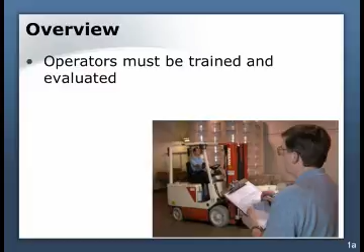Only a trained and authorized operator can drive a forklift. A qualified operator has been fully trained and evaluated in OSHA's required training topics, knows the general design and function of the vehicle, and knows the safety inspection and safety driving rules.

Operators can only drive forklifts if they have been assigned to use them. Your training covers the operation of the type of truck that you will be assigned to operate. You will need additional training to operate a different type of truck. Be responsible for the cleanliness, maintenance, and security of the truck that you have been assigned to drive.

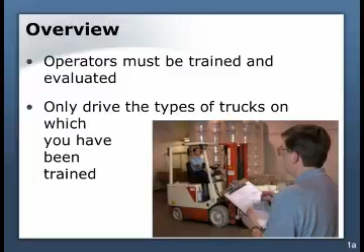Operating a forklift takes skill, mechanical knowledge, knowledge of workplace hazards, compliance with safety rules, and defensive driving under unique conditions. If at any time your forklift is found to be in need of repair, defective, or in any way unsafe, the truck must be taken out of service until it has been restored to safe operating condition.

You can prevent accidents by following safety driving rules. Remember the following rules of the road.

Do not allow anyone to stand or pass under raised forks, whether loaded or empty. Only loads that are within the truck's rated capacity can be handled. When you are using an attachment to handle a load, keep the load within the attachment's rated capacity.

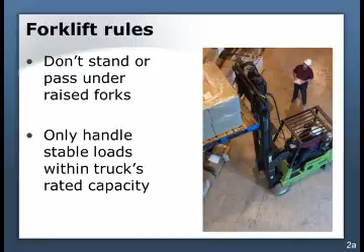Only manufacturer-approved safety platforms can be used to lift people. If the forklift needs to be used in a hazardous, classified location, it must be approved for the hazard.

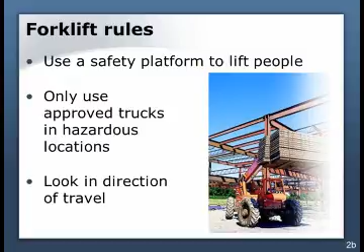Watch where you are going. Drive in reverse with the load trailing if the object obstructs your view. Keep a clear view of your path and look the direction that you are traveling. Never drive up to anyone standing in front of a bench or other fixed objects.

Allow no riders. Always keep your arms or legs within the truck. Placing them between the uprights of the mast or outside the running lines of the truck is not allowed.

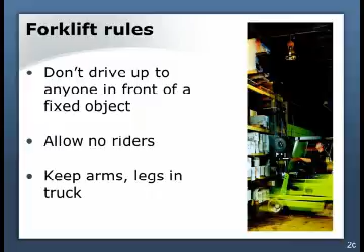Keep the load close to the ground while you drive. Raise the forks only as much as you need so that you clear the road surface. Tilt the load back slightly to stabilize it against the backrest.

Obey speed limits. Slow down for wet and slippery floors. Slow down for turns. Keep the forklift under control so that you can stop it safely.

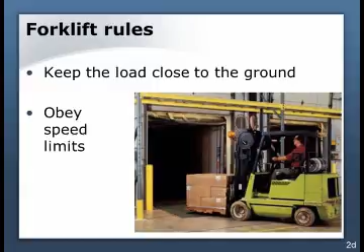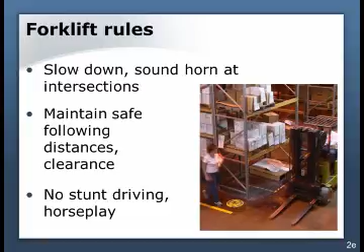Slow down and sound the horn at cross aisles and other locations where vision is obstructed. Maintain a safe distance of about 3 truck lengths from the truck that you are following. Do not allow stunt driving or horseplay, and avoid running over loose objects.

Stay within the rated capacity of dock boards and bridge plates. Make sure they are secure before you drive onto them. Keep a safe distance from the edge of any elevated dock, ramp, or platform.

While using the forklift to load and unload highway trucks, use mechanical dock locks or set the brakes and use the wheel blocks to keep the truck and the trailer from moving. Use fixed jacks to support semi-trailers that are not coupled to a tractor.

Check the floor for weaknesses before you drive the forklift inside. Do not use the truck to open or close freight doors.

When you get off of the forklift temporarily and remain within 25 feet of it and the forklift remains in your view, lower the forks, put the controls in neutral, and set the brakes. Lock the wheels if the truck is on an incline.

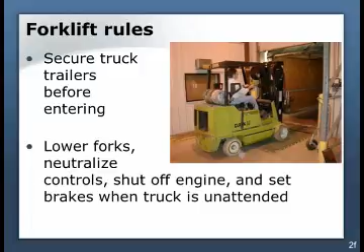If you will be leaving the forklift 25 or more feet away, or at any time it will be out of your view, shut the power off too.

Part of OSHA's emphasis on training is that operators need specific information on the types of trucks they will operate in the workplace environment where the trucks are used. When operators are sent outside of the facility for training, or when an outside trainer is hired to come in and present a training program, the employer has to make sure that the site-specific information is given to the operators.

When new employees will be operating forklifts, some of the operator training received from the previous employer may not need to be repeated, but site-specific information on the trucks and workplace will probably be required. Operators must be familiar with their trucks and the areas where they are used.

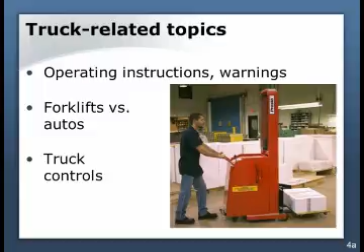The OSHA regulation outlines several forklift-related topics: operating instructions, warnings, and precautions for the type of trucks the operator will be authorized to operate; differences between the truck and the automobile; truck controls and instrumentation, where they are located, what they do, and how they work.

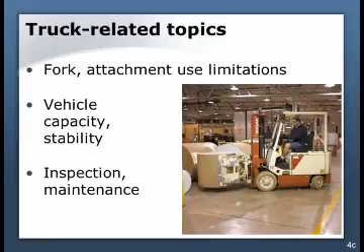Engine and motor operation, steering and maneuvering, visibility, including restrictions due to loading. Fork and attachment adaptation, operation, and use limitations. Vehicle capacity, vehicle stability, and any vehicle inspection and maintenance the operator will be required to perform.

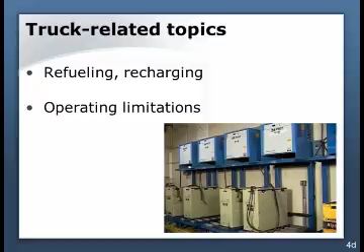Refueling and/or charging and recharging of batteries. Operating limitations. Any other operating instructions, warnings, or precautions listed in the operator's manual for the types of vehicles that the employee is being trained to operate.

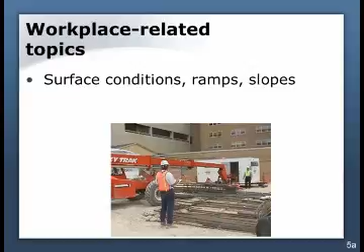The regulation also requires training in several workplace-related topics: surface conditions and where the vehicle will be operated, ramps and other slope surfaces that could affect the vehicle's stability, compositions of loads to be carried and load stability, load manipulation, stacking and unstacking, pedestrian traffic in areas where the vehicle will be operated.

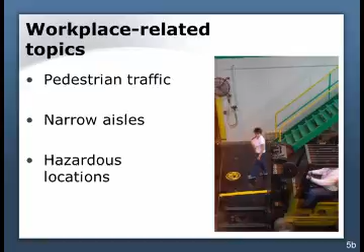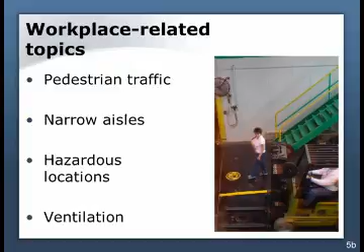Narrow aisles and other restricted areas where the vehicle will be operated, hazardous classified locations where the vehicle will be operated, closed environments and other areas where insufficient ventilation or poor vehicle maintenance could cause buildup of carbon monoxide or diesel exhaust, and other unique or potentially hazardous environmental conditions in the workplace that could affect safe operation.

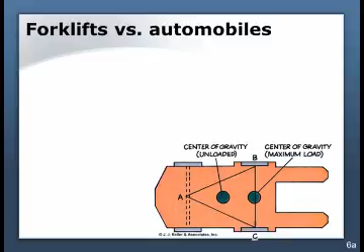Compared to driving a car, operating an industrial truck with a large load leaves the driver with limited forward visibility. Industrial trucks have rear-wheel steering, which makes the back end of the truck swing wide during a turn. Compared to cars, forklifts have different centers of gravity and balance. The center of gravity shifts as the load is raised and lowered.

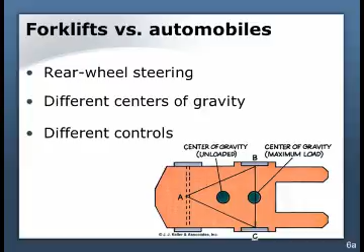The controls for operating an industrial truck are different. Industrial trucks can carry heavier loads with the weight concentrated at one end. Being familiar with the truck's controls and instruments is crucial to safe operation. Unintentional or mistaken operation of controls can cause serious accidents. Instrument readings give the operator and maintenance people important information about the condition of the truck.

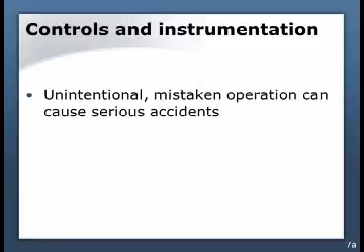On each type of truck you operate, know where the controls and instruments are located, what they do, and how they work. Industrial trucks are usually powered by gasoline, diesel fuel, LP gas, propane, or electric battery. Having a basic understanding of how your truck is powered helps you better understand the truck's capabilities and limitations.

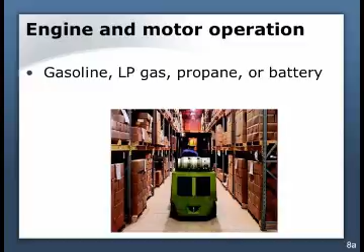For example, an electrically operated motor may not have enough power to lift heavy loads that a diesel truck can. Or, the exhaust generated by an internal combustion engine may limit the truck to outside jobs where there is enough fresh air. Industrial trucks usually have rear-end steering.

This helps with the maneuvering of the truck, but also makes the truck's back end swing wide during a turn. Because the trucks are frequently driven in reverse, the driver must be comfortable steering and maneuvering while looking towards the back of the truck. Understand the steering controls for the type of truck you will be operating so that you can maneuver the truck safely.

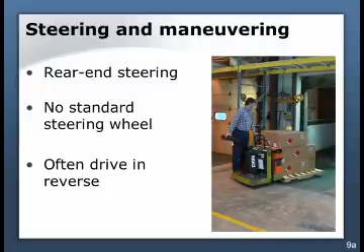Loads on the front of an industrial vehicle can easily restrict the vision of the operator. This is why it is very common for the operator to look to the rear of the truck and drive in reverse. Always look in the direction that the truck is traveling.

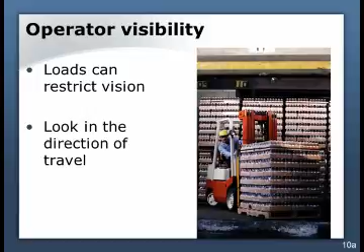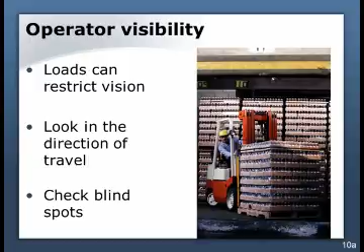Industrial truck operators also must watch for overhead obstacles and make sure there is enough clearance around the load. The driver has to check the truck's blind spots to the sides and rear. In some situations, the driver's lack of good visibility requires the truck to be guided by someone acting as a spotter. The spotter must observe from a safe area where the load and obstructions can clearly be seen.

Trucks can be equipped with or modified to accept attachments that allow it to move an odd-shaped material or to do jobs that were not considered when the truck was designed and manufactured. Many of these attachments are added to a vehicle by the dealer or the employer. Any additions or modifications that affect the truck's capacity, stability, or safe operation have to be approved by the truck's manufacturer with the truck's nameplate revised to show the changes.

Using attachments can cause restrictions or limitations to the operation of the truck that the operator must be aware of. Whenever the truck is equipped with an attachment, even without carrying any load, the truck must be operated as being partially loaded. Consider the weight of the attachment, the capacity of the truck, and the change of the truck's center of gravity due to the attachment.

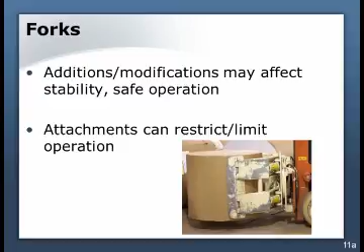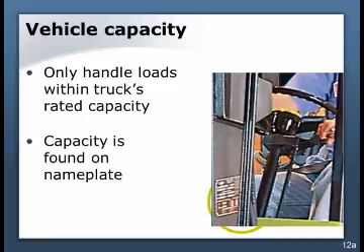Only the loads that are within the rated capacity of the truck can be handled. The capacities are found on the truck's nameplate. Typically, there are limitations as to how much weight can be handled, how high the load can be raised, and how far the load's center of gravity can be from the truck's vertical load rest. It is crucial to know the capacities of the type of truck you operate.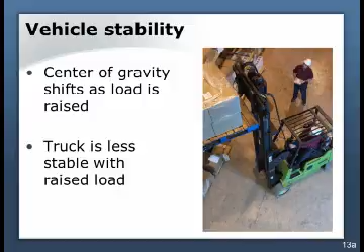Because the center of gravity shifts when the load is raised, the truck is less stable with a raised load. Moving an unstable truck can result in a tip over. Operators should always keep the load at the lowest practical point before moving the truck. Many serious injuries and fatalities result from tip overs.

To reduce the chance and severity of injury during a tip over, the operator of a sit-down rider truck should stay with the vehicle and lean away from the direction of the fall. The normal tendency would be for the person to jump off while the truck is tipping over, but the driver often lands on the floor in the path of the overhead guard and is crushed.

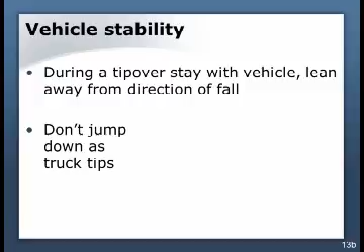On the other hand, the drivers of a stand-up rider truck should step off the rear of the truck during the lateral tip over. It is very important to understand the stability characteristics of the type of truck that is being used. Proper inspection and maintenance helps keep forklifts operating safely.

Inspect the forklift for damage, defects, and unusual conditions. An inspection must be performed before operating the forklift each day, after each shift when it is used around the clock. These inspections are not required to be documented in writing, although many companies do use the standard forklift inspection form to perform and document the inspection.

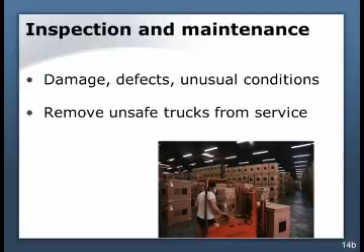If at any time a powered industrial truck is found to be in need of repair, defective, or in any way unsafe, the truck is to be taken out of service until it is restored to a safe condition.

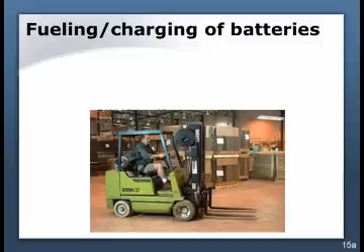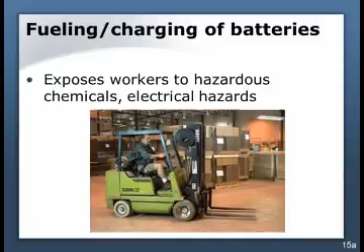There are always hazards associated with the refueling or changing and recharging of batteries. Gasoline, diesel fuel, LP gas, and propane refueling each present their own health and fire hazards. Changing batteries exposes workers to hazardous acids. Recharging batteries involves electric hazards, heat buildup, and the generation of hazardous gas. You must be aware of all the hazards involved in refueling and battery handling operations. Follow all of the precautions needed to control the hazards.

Flames, sparks, or electric arcs are to be prevented in battery charging areas. Smoking is not allowed. Tools and other metallic objects are to be kept away from the top of uncovered batteries.

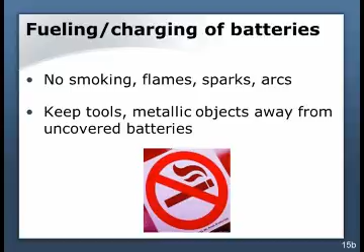Each type of truck has its own operating instructions, warnings, precautions, and limitations. Many of the forklift's rules of the road that were covered earlier apply to any workplace, but operators need specific information on the types of loads that are handled, typical pedestrian traffic routes, and any hazards that are unique to the facility.

Evaluations and refresher training can be triggered by accidents, near misses, assignments to different types of trucks, changes in the work environment, observations of unsafe operation, and evaluations that reveal the need for retraining. You must have an evaluation at least every 3 years. OSHA allows you to avoid duplication of training. If an evaluation finds that you are competent in any of the related topics, you do not need additional training in those topics.